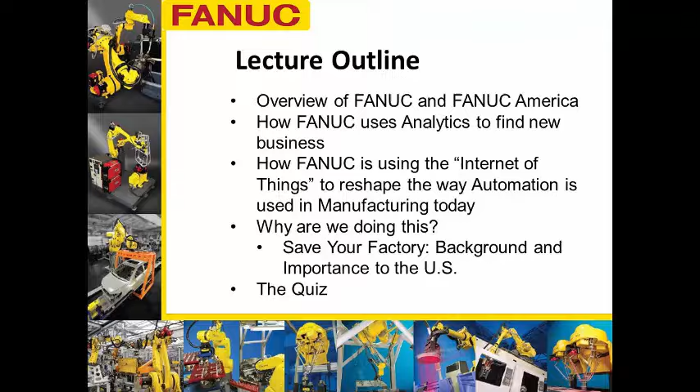who FANUC is. I wanted to talk to you about how we use analytics, because Michigan State was a big part of FANUC starting to use business analytics. I want to talk about the Internet of Things a little bit, because I know it's a really cool buzzword that's out there right now, and we're actually paying attention to that, and I think we've got a fairly innovative way that we're using it. And then I want to get into why. Why the heck does this matter to everybody? Why are we doing this, and why do we think it's important to be able to use this?

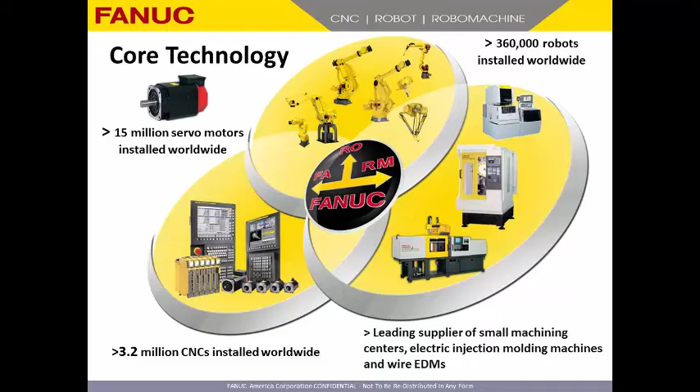So in the early 80s, we started making robots to put cars together. And since then, robots have exploded into all sorts of different things, and I'm going to get into some of that in a little bit. But overall, we have 15 million motors installed worldwide. Really focus on the robots. We have 360,000 robots, just FANUC, installed worldwide to date.

To give you an example, if some of you may or may not know how robots are used or what they're used for, there's a tremendous amount of automation out in industry today.

This is where our headquarters is. Actually, I was there yesterday in Tokyo, so if I fall asleep in the middle of this lecture, you'll know why. I just flew in yesterday from Tokyo, where our office is at the base of Mount Fuji. In Japan, it's called the Yamanashi Prefecture. So you see all these yellow buildings. There's going to be a big yellow theme here. Our robots are yellow. You can see in Japan, they paint the buildings yellow. In Japan, the cars at the factory are yellow. The robots are yellow. I have a yellow coat that I have to wear when I'm there. We have yellow hard hats when we're there. So everything's yellow. I didn't wear any yellow today, but I have a lot of it.

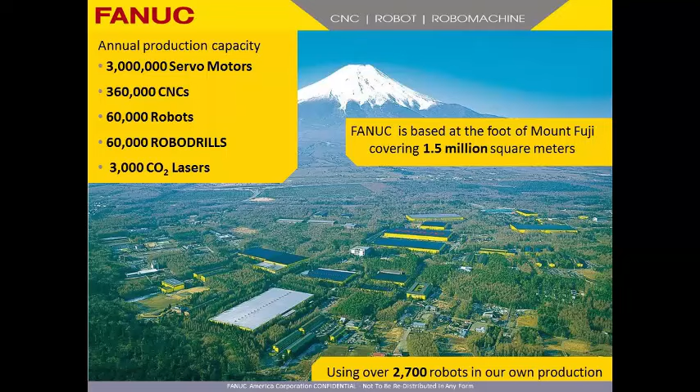You can see all the things we make there. We can make 3 million servo motors per year. We can make 360,000 CNC machines. That stands for computer numeric controlled machines. We can make 60,000 robots per year, 60,000 of another machine called a robo-drill, and 3,000 laser processing machines per year. We actually use 2,700 robots in our own factories themselves. So we actually have a lot of robots that we use in our own factories.

Here in America, my office is down in Rochester Hills. So just down 75, if you're on the east side, right by where Chrysler's headquarters is. Just behind there is where our headquarters is.

So we're a wholly owned subsidiary of our parent company in Japan, and we also have a secondary headquarters in Chicago where we do the CNC products as well. That's where FANUC is. We also have offices all across the United States. I worked at our Southern California office for a number of years before I came here. We have offices in Charlotte, Toronto, and a bunch of other places as well.

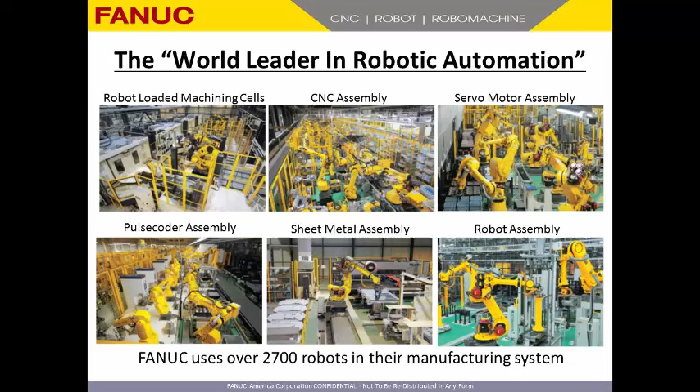So we're a wholly owned subsidiary of FANUC Japan. We are the world leader in robotic automation, the #1 company in the world by far in terms of robotic automation. Up here you can see some of these pictures—these are all pictures of our factories.

Part of what I want to talk about today, I need you to have at least a semi-understanding of what robots are used for. You can see up here some of the pictures—robots making other robots, robots making some machines, robots making motors, robots assembling other robots. So when you think about robots, you really need to think about where they're used and what they're used for.

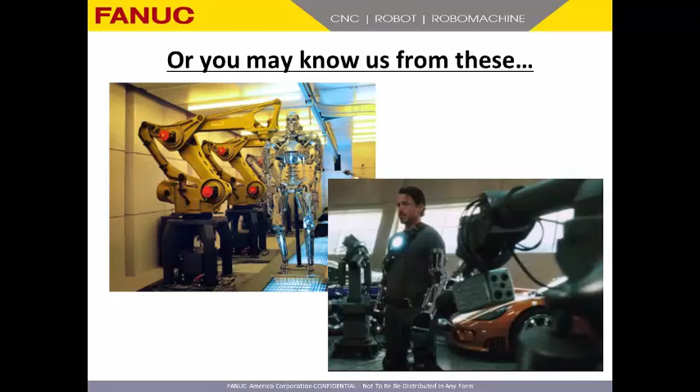If you watch television or movies, you may think of us from stuff like this. Our robots were in the movie Terminator, they were in Iron Man, they've been in commercials. Anytime you see something yellow, it's ours. Sometimes the movie companies paint the robots—like the one in Iron Man, they painted green. The ones in Terminator, we gave that company brand new robots, but when they got there, they looked really shiny and new, and it didn't fit in for the movie very well, so they actually painted them.

They had the costume guys paint the robots to make them look really old. When we got them back, we left them that way and sold them as is to people, telling them that they owned the robot that was in Terminator and stuff like that. That was like a special deal that we ran. So we've been in Spider-Man, Terminator, Transformers—that's kind of a cool part of our business, that people like to put robots in different things.

But in manufacturing, a lot of people say, where are robots used, or what is automation all about? I like to think about the show called How It's Made, on the Discovery Channel or the Learning Channel or something like that. Do you guys ever see that show? I love it, because when I look around, everything I look at, I think about how it's made—the chairs in this room, this podium, this computer monitor, that projector, the garbage can, the skateboard someone brought in here earlier. How is it made? That's where automation comes into play.

You can think about all the different markets that we have—flip-flops, pharmaceutical stuff, computers, couches, jewelry, cosmetics, farming, aerospace, construction, automotive, beverages, food, wood, everywhere. Anything that gets manufactured has some level of automation today, because we need to make things more productively than we made them before—we don't want to spend $600,000 for a car these days. We want to spend what we're going to spend. The market's driven us to provide things at a more competitive price, and in order to do that, we need to be more efficient at what we do. So when you think about automation, you've got to think about manufacturing in general—it's everywhere, and we're everywhere, which is kind of a cool part of my job.

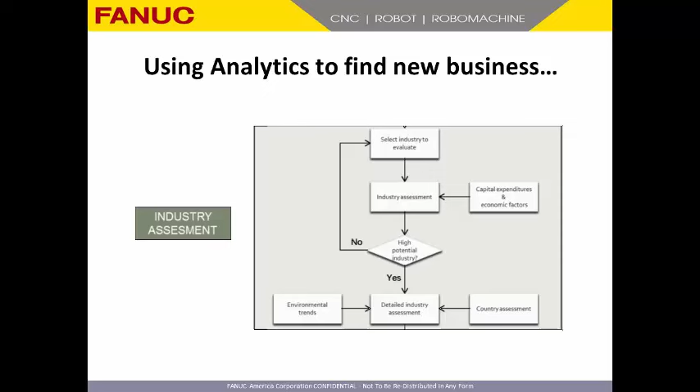And that's how we're using analytics. Dr. Rodimer and us came up with a very simple flow chart. I'm not going to go through the whole thing, but in essence, we were trying to pick certain industries and do an assessment. Working with Robert, we found a couple different metrics that we were going to use.

These are all public metrics. We felt like if we could see what the capital expenditures for that certain industry were from the Annual Survey of Manufactures, we could look at what the revenue was for that industry, how much labor that industry put into each unit, which is also from the Bureau of Labor Statistics, how many employees they had, and how much output per hour they did, which tells us how productive they are now. And then the last factor was a capacity utilization number, which comes from the Federal Reserve, which says this factory should be able to produce 100 whatevers per day, and they're currently producing 50. So they're only half utilized.

And we felt that if we could take these data points and look at them over time and try to analyze what that looked like, we could try to predict whether an industry was going to stay here. Really what we were trying to do is say whether an industry was going to go offshore and there's nothing we can do about it, or whether the industry was going to stay here and it didn't matter whether they automated or not - it was going to stay here no matter what.

Or what we were really looking for is the tipping point companies - the ones that could go offshore, or if we helped them automate, they could stay onshore. Or if they were already offshore, we could help them automate and come back onshore as well.

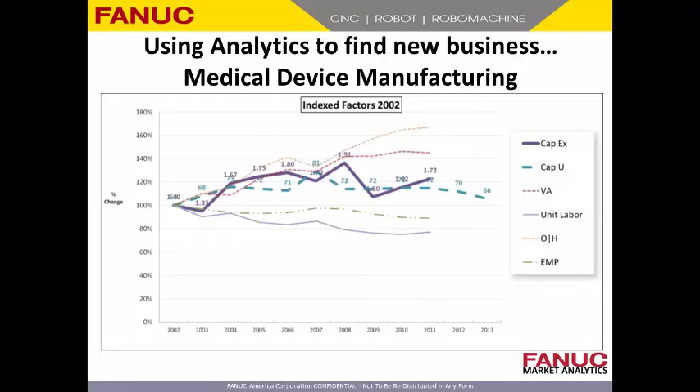So we analyzed this, and we found that medical device manufacturing is automating, and it is staying here, and it's probably going to stay here. There are a lot of other factors we looked into as well, in terms of market regulations and things like that, where the industry itself said people shouldn't make medical devices elsewhere because of the quality control that needs to happen with those things.

We're trying to find what industries are going to want to automate before they even know that they need to automate. Once we understand that an industry is a prime target for us, we're utilizing it to create sales. That's most of what people want to use business analytics for—to make more money and sell more things. And that's what we do. It's our ultimate goal to sell more robots. So that's how we use it.

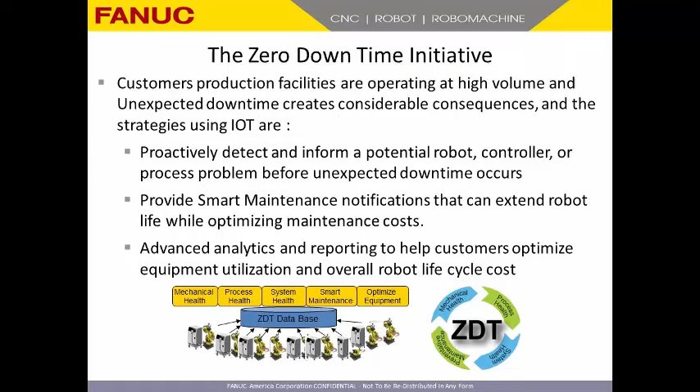And then we're providing advanced analytics and reporting to customers to help optimize their equipment. So today what we can do is I can go into a plant and the robots are all working, consuming energy, doing things. I can actually analyze how those robots are moving, and I can optimize their behavior to try to maximize or minimize your energy usage. I can maximize your productivity and output by minimizing how much energy you use.

We've done studies on how much energy a person consumes actually working - driving back and forth to work every day, the lights, the heat, the food that's consumed, everything that's needed for a person to be at work. It's about twice that of what a robot needs to run every day. So we've kind of done those studies as well.

What we're trying to do is have your plant running with the robots up on this - this is the Internet of Things. The robots are connected on Ethernet, and they're telling us all the time: this is what's going on, this is how I am, this is how I feel.

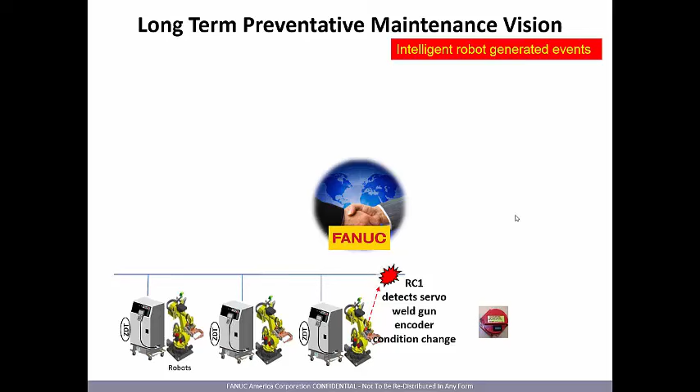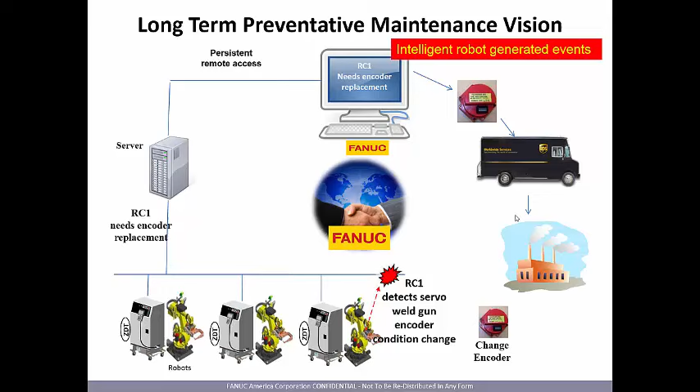So maybe something happens where the robot detects something that's wrong. When it does, it sends a message over a secure server to us that says something bad's happening. Our system instantly takes that part, automatically ships it. It gets to the plant with a notification that says change this part out on the robot before it goes down, because you don't want to lose any downtime. And it all happens automatically because it's connected. At any time, someone can go in and look at a report and say how are things going - I'm always connected.

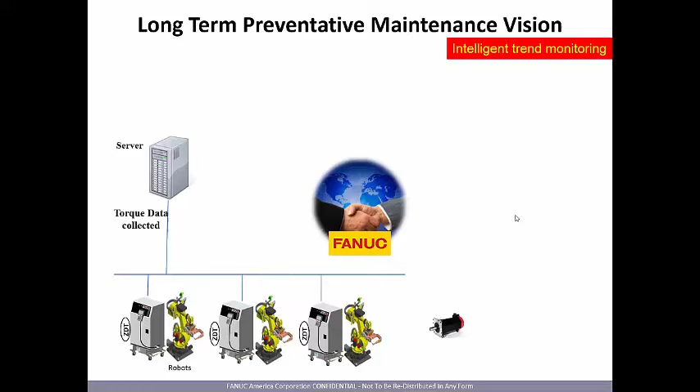We also collect torque data. When the robot's moving around, there's a lot of technical stuff happening within the robot, but in essence we're trying to see how the robot feels - if it's feeling good or feeling bad. And if it's feeling bad, we can sense that and say this is what the torque should look like, and this is what it actually looks like. So, same kind of thing - go through and change a new motor.

We're also putting a lot of things on smartphones as well. FANUC has an app that you can have - it can be connected, you can get your whole plant up and running on this app. So if you don't want FANUC to be analyzing your data, you can analyze your own data. As a business owner, you can have supervisors with one version of the app, and plant guys with another version, and they can always be looking at what's going on at the plant level.

The Internet of Things to us is about being constantly connected to the products that we sell, and having the users of those products also be constantly connected to them. These products are used first shift, second shift, third shift - 24/7, 365. From a management standpoint at a plant level, you can only touch it certain periods of time, but if it's connected all the time, you might get a text at 2 o'clock in the morning saying the robot's down or going down, please go in and fix it. So to us, that's what the Internet of Things is - being able to have the robots be always connected.

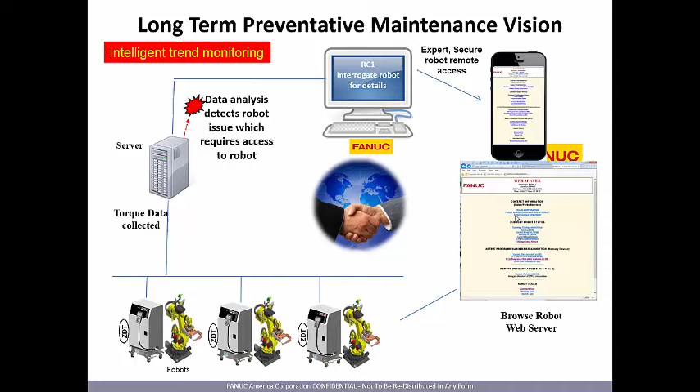The challenge has always been companies don't want this link right here. They don't want an outside company, this is us, talking or having a data link to inside their company. So we worked with Cisco to create some secure servers that is beyond my knowledge base, but it makes IT people feel very comfortable. We say, we worked with Cisco, here's this thing that if you put that server in between these two things, then everything's secure, and I can't go steal your company's secrets, but you can send me the robot data securely without any risk of failure.

In this flow, do you contact the customer before the good gets there? It seems like how you explained it, the repair part arrives and at that point they know what it's doing. No, we actually do contact before that. Right in here is kind of where we currently contact it. We currently have this beta testing at a few different automotive companies right now, and it's working really well. Our robots are really reliable, so it doesn't happen often, but an automotive plant might have 1,000 robots in it, and sometimes they crash, and sometimes an operator has a mistake. There's a customer contact in here as well. Actually what we've done is we've gone to providing weekly reports, daily reports, or monthly reports, whatever the customer wants, to make them understand the overall health of the whole system.

So that's what we're currently doing with the Internet of Things. Any questions there?

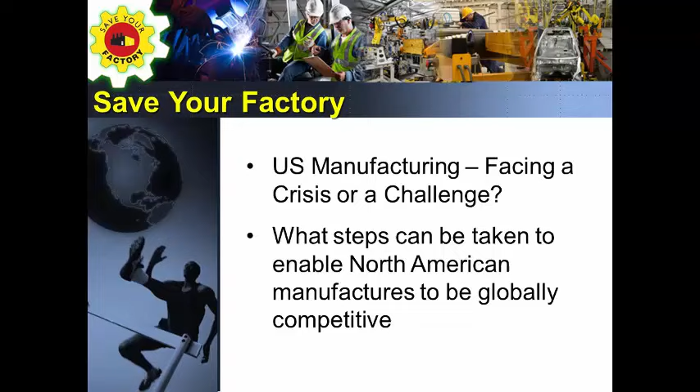So the big question then is, why are we doing all this? For the next probably 10 minutes or so, I'm going to go through what we like to think of as Save Your Factory. I've been building up to this of, we're an automation company. FANUC's a global company, but I'm focused on North and South America, and this is particularly about North America. Some of these things about manufacturing are just good data and things happening within U.S. manufacturing today.

I've been giving this talk for about 10 years, and it reshapes itself every year. When I first started giving this talk, it was to inform people that they shouldn't necessarily move their production to China as a way to save cost, that you could keep it here and do things differently. Now people are starting to realize that. We've already gone through the shift of a lot of stuff going to China, and now we're starting to talk to people about things coming back from China or India, or people that haven't yet made that decision. So this has really changed over time about what this talk is actually about.

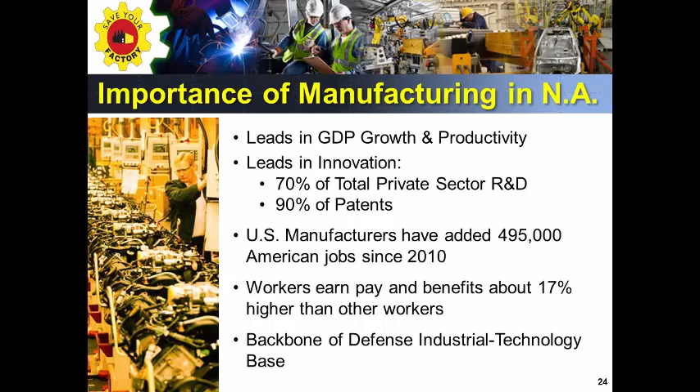As I mentioned, we still are exporting a tremendous amount of goods. For the fifth consecutive year, we've been on a record-setting growth pace in terms of how much we've exported. And when you look at why manufacturing is important, 88% of the things we export come from the manufacturing sector.

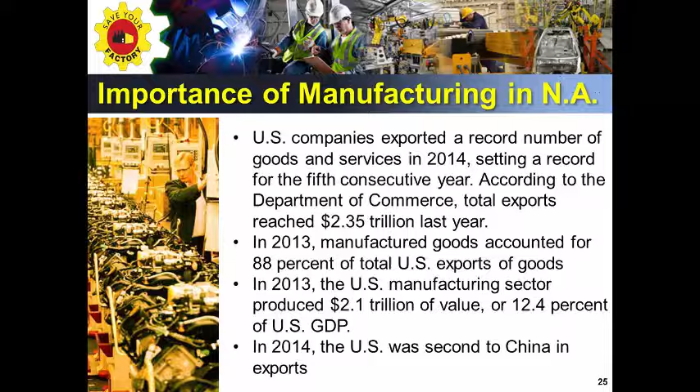We don't have that many raw materials, I guess, is the thing. We're exporting things that are created here. And this relates it back to GDP. All of our manufacturing, $2.1 trillion, is 12.4% of GDP. That's the largest subset of GDP out of all the things that go into GDP. Manufacturing is in there, and we're second only to China.

We're kind of back and forth. Last year, for a number of quarters, we actually exported more than China, and now China's back on top with exporting more than us.

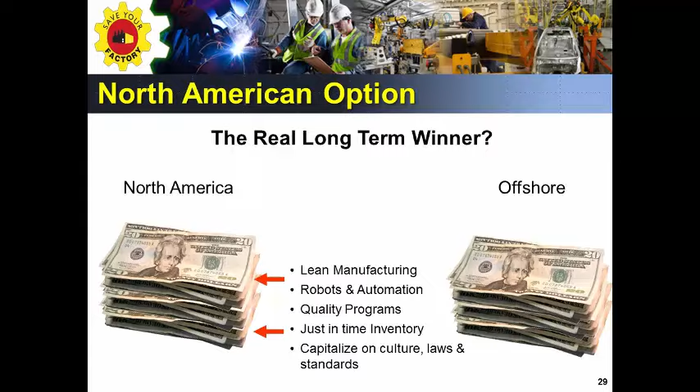So the paradigm is that if you make things here, because we have high labor, high health care, taxes and environmental laws, it costs a lot more to make stuff here than offshore. So someone might be sitting out there thinking, yeah, I'm going to go make my stuff in China, I'm going to make so much more money because the thing that used to cost me $1 to make is only going to cost me 50 cents in China.

So they went off to China and made it. Today it's a little different than that because people have either already tried that or it's not as attractive in China anymore. Really what's happening is, they take a piece part, like this clicker, and say this is how much it costs to make it here. I know that already. If I make it in China, it's going to cost this much, plus I have to pay to ship it from that country to America, and that's my next cost.

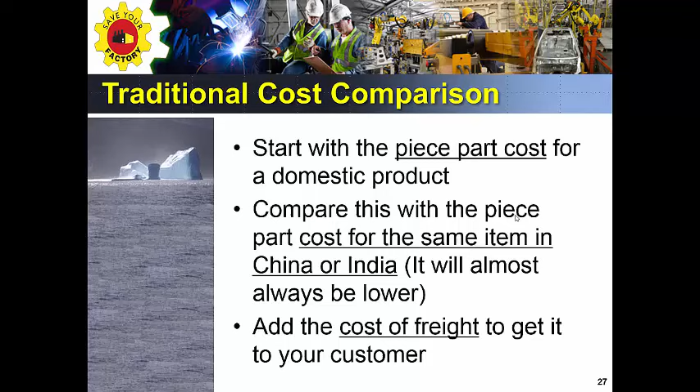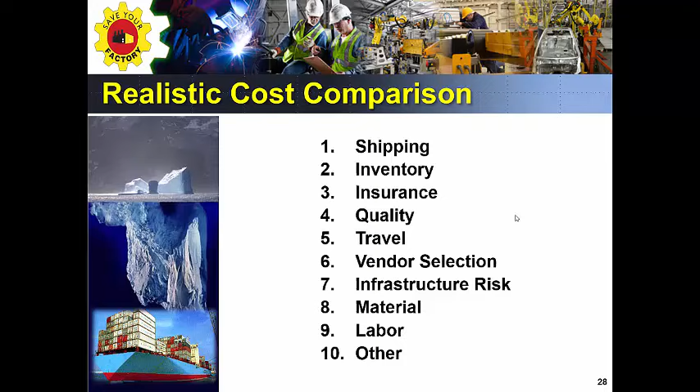And there's, I could talk for a day about this, about why that's not actually the case. You have to think about shipping, inventory, insurance, quality, travel. This is where getting into risk of IP theft comes in.

We've seen this like crazy, where someone decides to make this in China, and because it's made in China and shipping's expensive, you have to make 1 million of them because that's the best way to get them to market. So you make that commitment, you make it cheaply overseas, you make 1 million of these, it gets on a boat, and the boat has to sit in the ocean for a month.

And literally by the time you've made all that decision, this product is out of date and someone wants a new design. Now you're stuck with 1 million things, because the guy that came up with a new idea made something you can't sell anymore. And you're stuck at that point.

So making things locally allows you to be much more agile, because now I can make 50 of them, test the market, see if the market is accepting it. And if it does, then I can make 200 of them, and if it's still good, then I can make 1 million of them. I can distribute more readily, and I don't have to worry necessarily about the transportation costs.

Plus, I still own all the IP for it. So as you mentioned, you might take some technology and trust somebody in a foreign country, and next thing you know, your exact products are for sale in another country at half your cost too.

So what we think is that taking something you make here and changing the way you make it by adding automation, by adding technology, you're able to reduce the cost of the things you currently make here. And with some education, you realize that making things offshore costs more than you originally thought. We think that puts us on a level playing field, and even tips the scales to make things locally here better in the end.

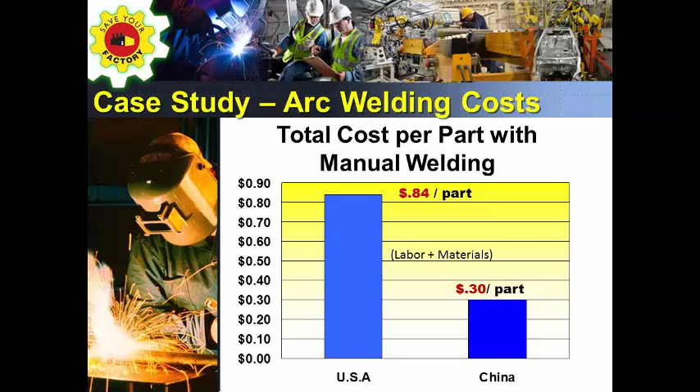Here's a couple examples, I'll go through these quickly. We did a couple case studies on welding a part together. So when you weld stuff, like the metal frames of the seats you guys are sitting in, those things need to be made out of metal and welded together. When you use American labor versus Chinese labor, you can see it costs 84 cents a part versus 30 cents a part. This is a real case study that we did.

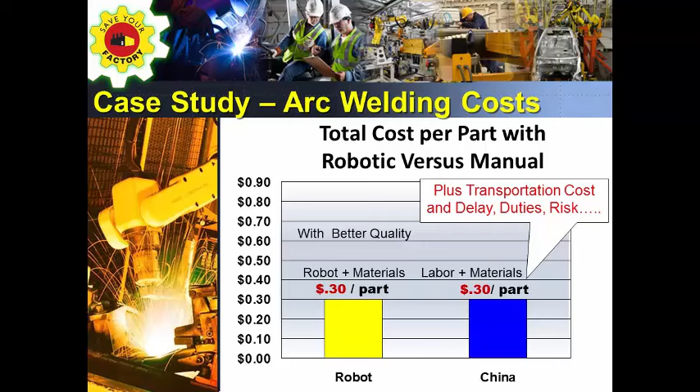However, when you automate that process, we can get down to 30 cents a part as well. So there's an initial investment that gets made, but the labor gets reduced, the product quality goes up, the productivity goes up, and the price goes down. The same thing with some machining studies - it costs more with labor, and then you start to automate it, and it gets cheaper.

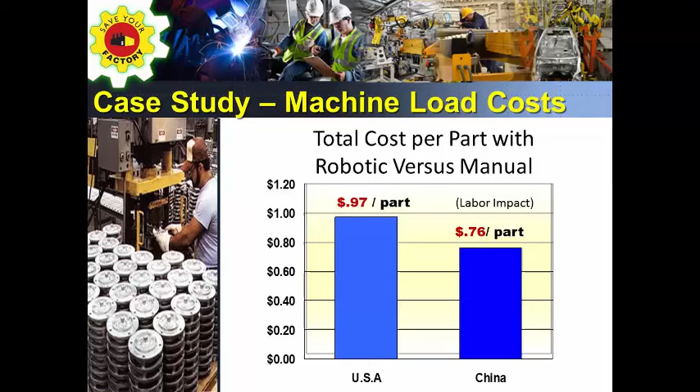So it helps. One of the things I see in manufacturing today is, as I mentioned before, I used to go into plants all the time and say, let's automate. And they'd say, no, I can't, I don't want to lay off my people.

Today is a little bit different. When I go into plants today, they'll say, I'm dying because Ford just gave me this contract to make 1 million parts for their upcoming program, and I can't find skilled labor to actually do what I need to do anymore. I've got a whole other presentation about baby boomers retiring and millennials coming up, where there's a 30 million person worker gap right now, where more people are retiring than are coming into the workforce. The recession didn't help either, because that created early retirement for a huge sector of the manufacturing business. And we haven't been training skilled employees as well as we should have.

So there's this huge gap right now where manufacturers, even if they wanted to do it by hand, can't find the people to do it by hand. So today I go in and they say, listen, I've got to make 1 million parts, can you help me automate to do that in the most cost-effective way? So it's not so much about trying to replace people, it's about taking my business from 500,000 parts to 1 million parts, and figuring out the best way to do that. Automating is the way.

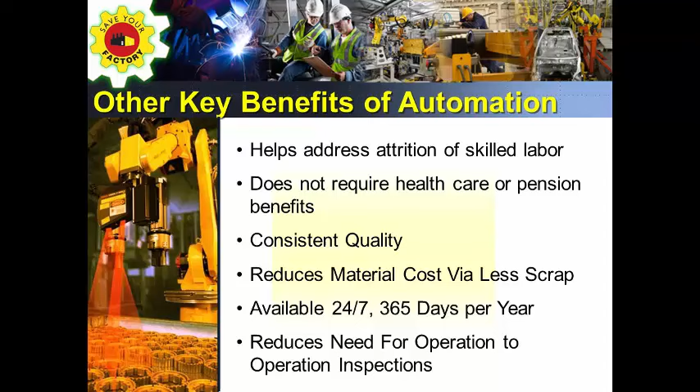So it helps with the skilled labor issue. There's no healthcare required, obviously. When you do things with robots, you get consistent quality. It reduces material cost. They can work all day long. And robots have cameras on them so you can do inspections automatically.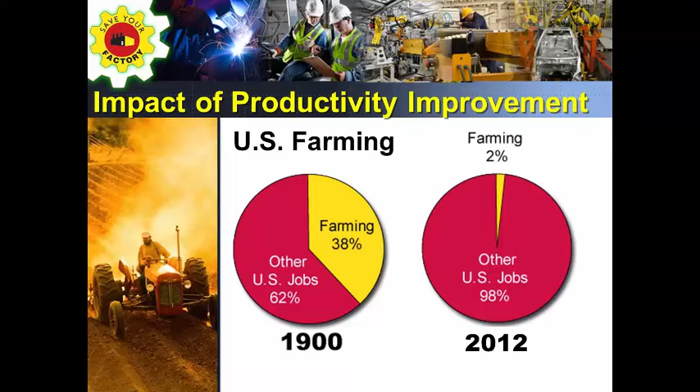This isn't the first time this has happened in manufacturing. It's happened before - farming is the first example. It's important to take note, this is on the quiz later. Farming in the 1900s, 38% of our entire country were farmers. A few years ago, 2% of our employment were farmers. When you look at it, this is kind of the way people think of manufacturing today - there was a lot of people in manufacturing and now there's less. It's not as dramatic as this, but look what happened with farming.

Just since 1961, our agricultural exports have increased 300%. Today we're the largest exporter of food in the world, and it's because it changed. Guys with oxen and plows just couldn't sustain the population growth. It had to change, we needed automation. There's actually no robots really in farming per se right now, but it's machinery, stuff we use to be more efficient, which meant less people.

But the industry's healthy, and we make a lot of food. We make the most food out of anybody, and the productivity's gone up. So it's happened before. Same thing in the steel industry.

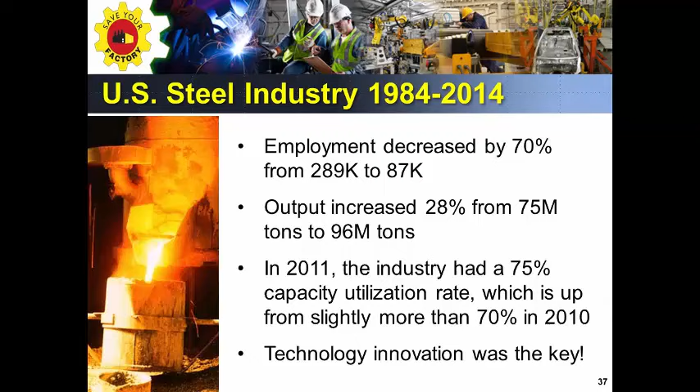The steel industry from the 80s until now decreased 70%, but our output went up 28%. And in 2011, there was a 75% capacity utilization rate. That's really, really good. So the steel industry has kind of gone through this as well.

And again, technology is the key. They use technology. Otherwise, and this has happened a bit in the steel industry, where steel manufacturing has gone offshore, to other countries. But we've been able to maintain a significant portion of that here in the States as well.

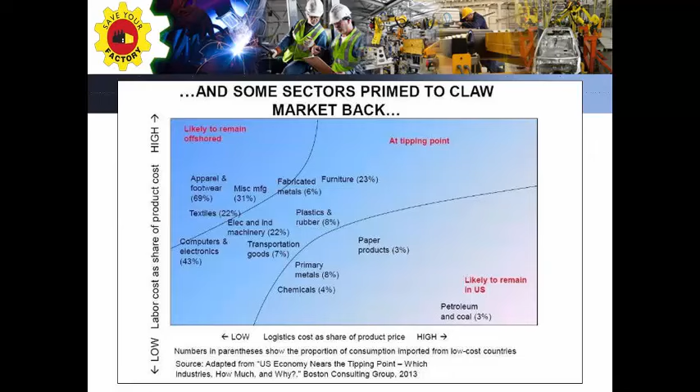But when you look at things that are kind of in the middle here, that have medium labor and start to get more expensive, these are a lot of the industries we're looking into - plastics and rubber, electronics, computers, transportation goods, furniture, and things like that. So those are the types of things. There's a lot of people actually looking at this right now, not just us.

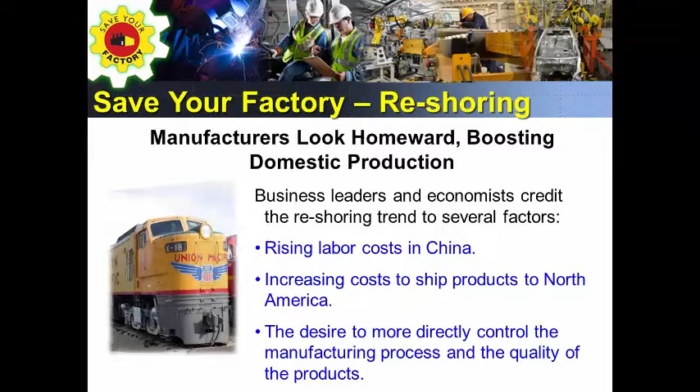All right, so in general, in summary, take note - a lot of the reason why people are looking to come back: they're looking at the rising labor costs in China. China's labor costs now exceed that of Mexico, where Mexico is now the cheapest labor country to do business in. There's increasing fuel costs to ship things to North America.

It's very, very expensive to ship product to North America. And then, as I mentioned, there's kind of a national desire now to be more in control of the manufacturing process and the quality of the products that are coming in, which is why it's called reshoring. That's a term that people use today. Okay? But there's room for growth.

Look at some of these statistics. This is kind of interesting. When we look at total employment in manufacturing, and we look at how many robots we sell in manufacturing - this is not just our robots, this is all the robots - in U.S. manufacturing, if you look at all the employees, there's one robot to every 86 employees.

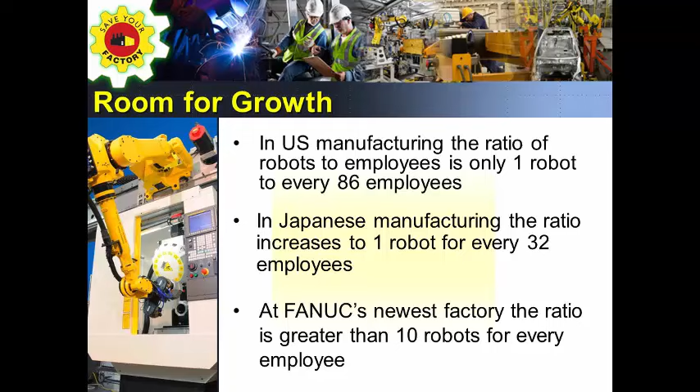So that tells you how many employees we have in manufacturing, how many robots we have, and we do the ratio. In Japanese manufacturing, there's one robot to every 32 employees. Korea is a very similar number. So that means they're much more automated. They have less people, but they're much more technological countries.

At our factory, at FANUC, where I work, there's actually 10 robots to every person. It's totally flipped over. Like I said, we use 2,700 robots in our own factories, where we have 10 robots to every person in manufacturing. FANUC's a very, very automated company. But these are just some of the numbers to show that even to get into the Japanese area, Germany also has a very good number in terms of robots to manufacturing people. So those countries, we're pretty good, but there's still a lot of room for growth there.

So in summary, like I said, we're trying to save U.S. manufacturing. I work for FANUC in America. We're trying to keep manufacturing in America. By doing that, we think it's going to have a positive impact on the U.S. economy - it's one of the main drivers for growth in our economy - and also have a positive impact on the environment. We're trying to reduce energy costs like crazy. So that's really what we're trying to do.

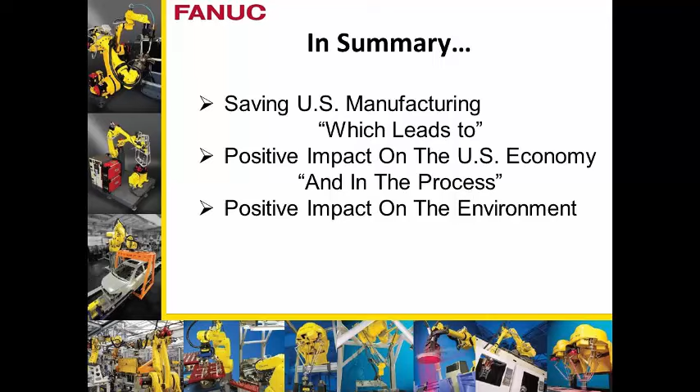I think that's it. Any questions for me?

Was that the best guest presentation you guys have had all year? Thank you very much.